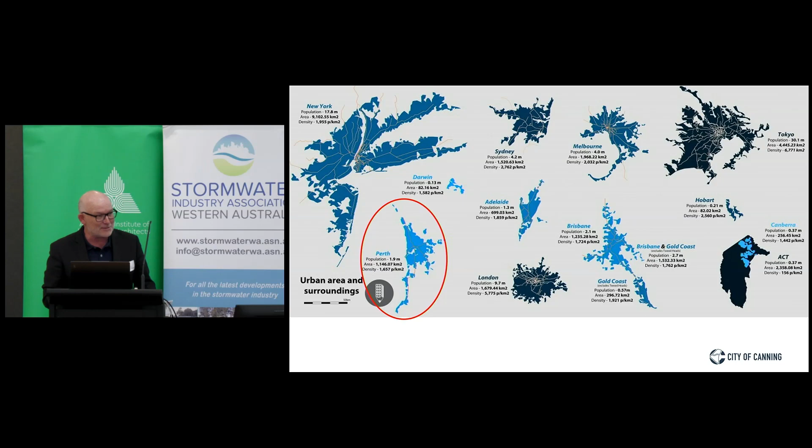From an urbanist perspective, Perth's sprawl has reached an unacceptable level. It's about 150 kilometres north to south and increasingly east into the hills. And apologies to Wanneroo, that was a very good presentation, but some of these things may seem as if we're taking a bit of a shot at it.

But as I say, from an urbanist perspective, we live in one of the most isolated cities in the world. There's a near endless supply of availability of land. Unfortunately, it only requires the levelling of dunes and the clearing of bushland and mature trees to add the brick and tile houses. But far from building the Australian dreams of the future, we've created homes crammed together in rather soulless and remote suburbs. Again, apologies.

Whilst it's cheaper housing, some 30 to 50 kilometres from the city centre, it's not affordable living for many of the young families choosing to live there because there are few other options. The state government has for years set an urban infill target of 47%. 3 years ago, only 29% of all new dwellings were in established urban areas. The policy has largely failed.

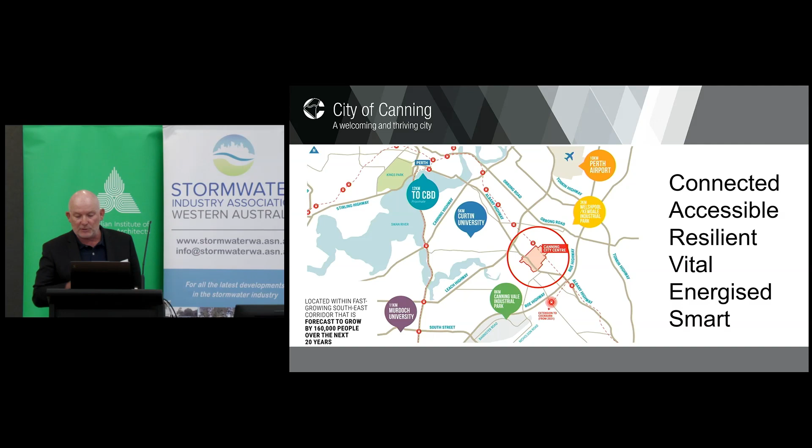So why is Canning City Centre and our blue-green projects part of the answer to Perth's sprawl? The population of Canning, currently just under 100,000, is expected to grow by 60,000 people in the next 30 years. The Canning City Centre is a designated strategic metropolitan centre only 12 kilometres from the Perth CBD. The city centre has an approved planning framework that allows for up to 25,000 people to live in the city centre. And the area is also well served by public transport, employment and access to great amenities.

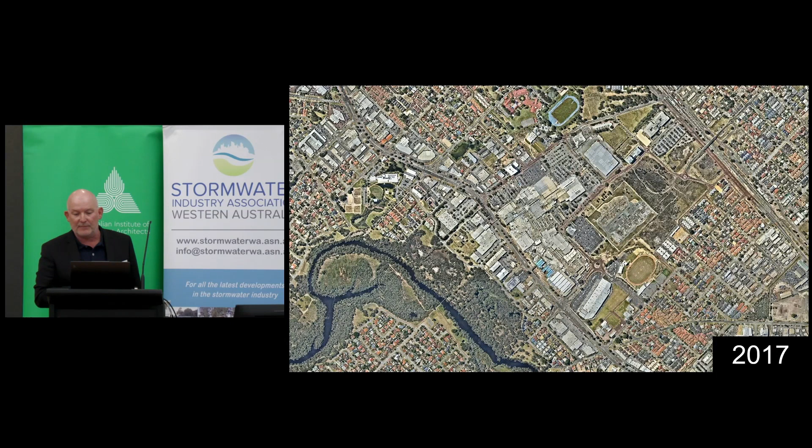In 2017, the city approved the Regeneration programme to upgrade the infrastructure to attract future investment. The investment will support the approved activity centre plan for up to 10,000 dwellings in the city centre. It's a rolling programme directly linked to the long-term financial plan to deliver our vision for the area. The first year of work that we put into the Regeneration programme was working on the finances with our finance team to make sure that this could stack up. Of course, there's a few things that might get in the way. That is the economy, COVID, and other things that don't make the development happen that we've planned for.

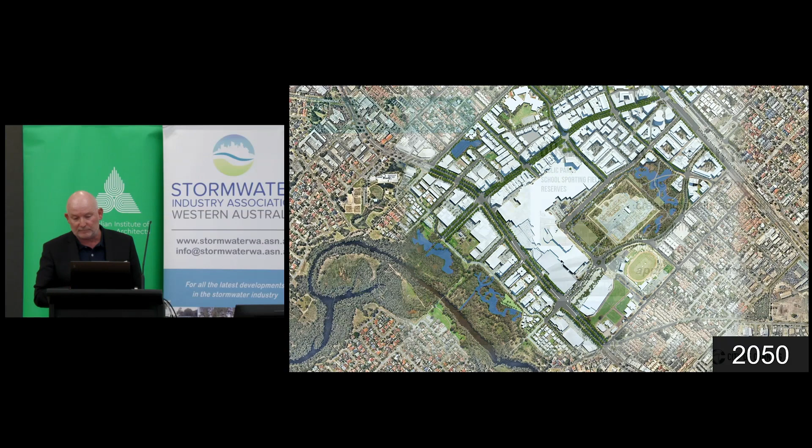We developed a story about the future of this place, one that would resonate with all levels of government, state agencies, developers, investors, and our community. The vision was for transformational change by creating a competitive advantage over the other strategic centres. We called Cannington a riverine city that promotes the importance of high-quality blue-green infrastructure for our community in partnership with Watercorp and many other agencies that are represented here today.

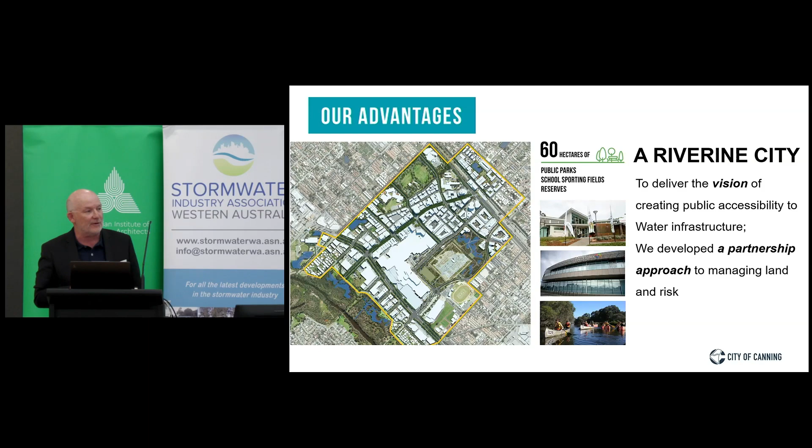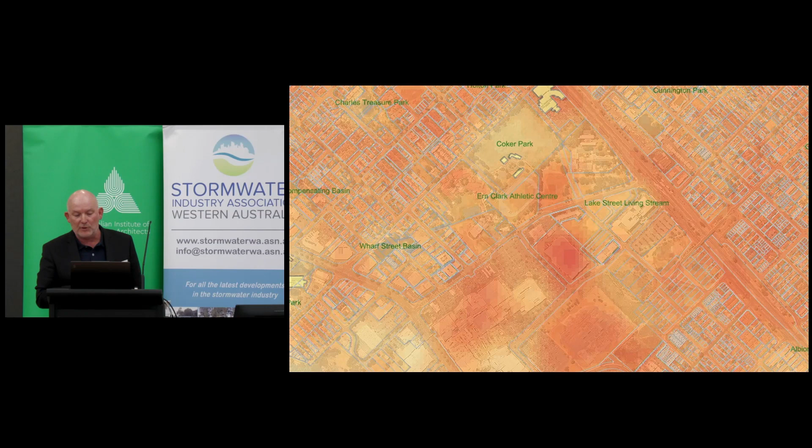The reason why we place a strong emphasis on a riverine city vision and the incorporation of blue-green infrastructure in this area is that Cannington is one of the hottest suburbs in Perth. We've got about 11% tree canopy coverage, and it's really an unsustainable situation if we carry on. After years of blocks being subdivided, trees being removed, large expanses of car parking and roofs around the shopping centre, the urban heat island effect is intense.

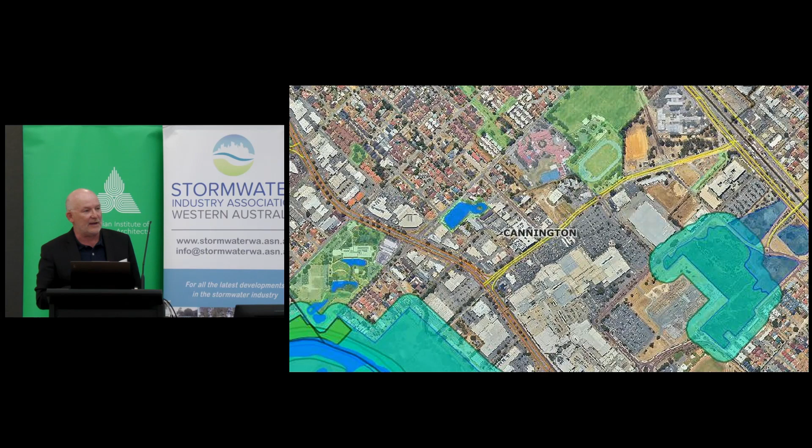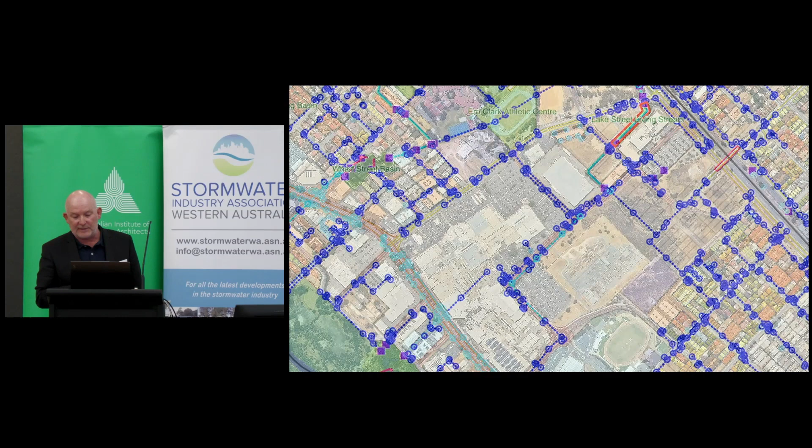Joining up the green spaces, once fenced off in Cannington, will greatly assist with mitigating that urban heat effect. We're delivering new parks in areas that were once fenced off. We're utilising the hidden network of drains and basins which become a powerful driver of change in the urban environment. We're creating the amenities required for the higher density living to support that population of up to 25,000 people. It is allowing people to be closer to nature with all the beneficial impacts that brings, and we've heard a lot about that over this conference.

But before we can win awards and cut ribbons and open these projects, there's a lot of work to be done. Essentially, planning, planning, and more planning. You can't emphasise the amount of planning that needs to be done to then successfully deliver a programme of works. This lays the foundation to attract the funding and assists to deliver successful and potentially award-winning projects. And Canning's been very lucky in that regard.

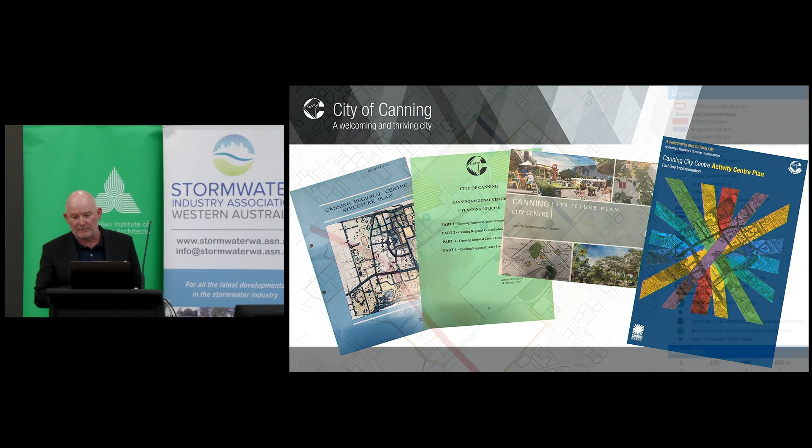The activity centre plan for the town centre is mostly zoned centre in the town planning scheme, which gives great flexibility for developers. The locations of public open space, urban streams and water sensitive areas is also shown on the plan. It allows a mix of inner urban city living with differing tenure types and should be an area of affordable housing through to more expensive private dwellings with a soon-to-be elevated station and rail on its doorstep. Strategically, the Canning City Centre can accommodate that 25,000 people over the next 30 years, which goes a long way to meet the state's infill targets.

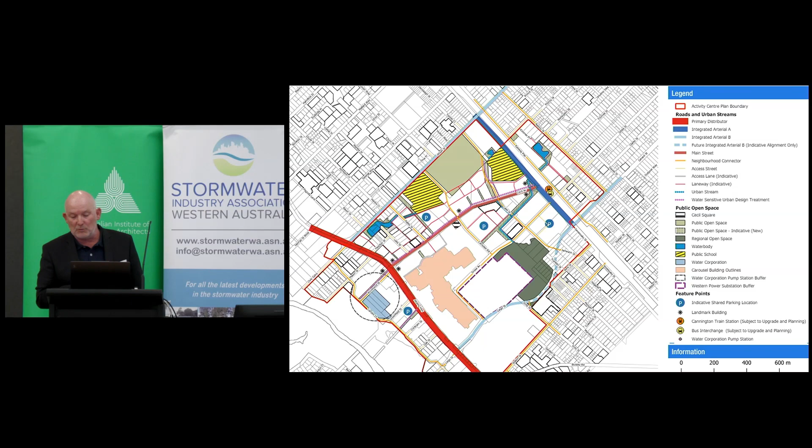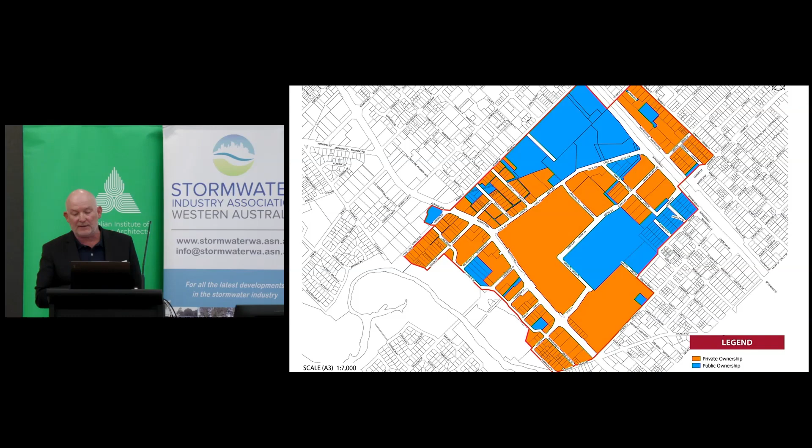Everyone involved in master planning knows that without the control of the land, the best laid plans for future development will not happen. There are large parcels of land, both in public and private ownership in the city centre. You can see that the privately owned land is in orange and the public's in blue. We are leveraging the publicly owned land to kickstart infrastructure delivery that will promote future investment attraction.

To implement our vision, the city invested significant resources into leading this planned change with a 10-year, $76 million regeneration programme. The programme is funded by ring-fencing the rate base of the new city centre development. That's all new development from 2017, and a loan facility is on hand from the West Australian Treasury Corporation to smooth out any peaks and troughs in the borrowings.

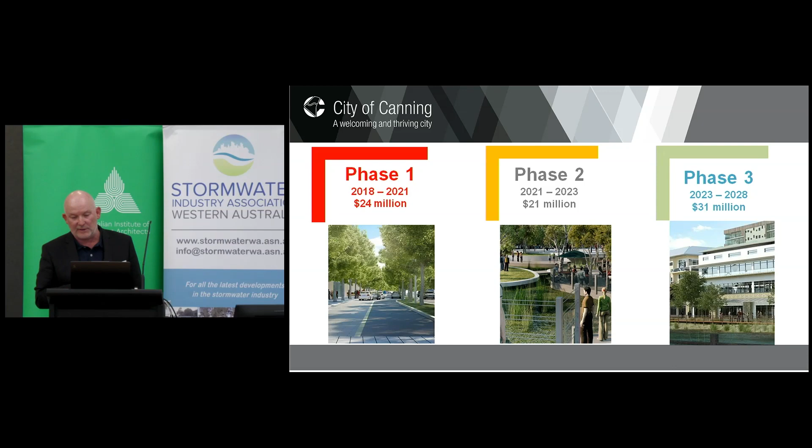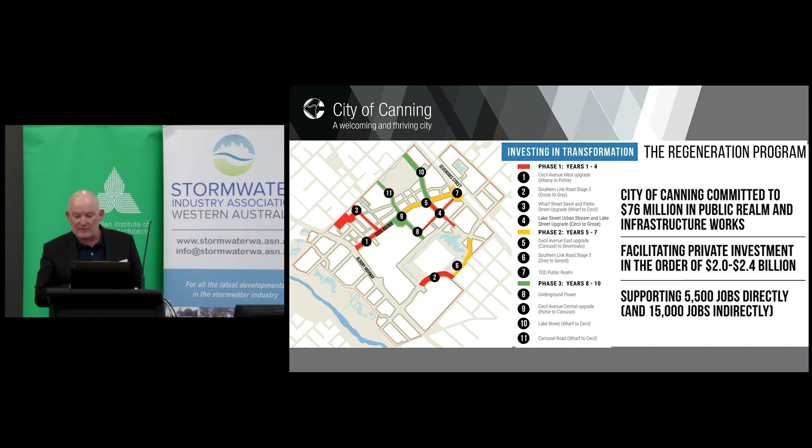When I first joined the city some 7 years ago now, it appeared the hardest part of the process was where to start. With a list of discrete projects, funding model in place, and the council's support. I can't overestimate how important it is to have the council support, and it's great to see councillors here talking about these projects, and it's an area that's really important to give a bit of credibility to what we're doing. We just needed to commence the work in a staged approach to delivering the first programme of projects. More importantly, we had an expectant community that had been part of the planning for years. They now wanted to see action.

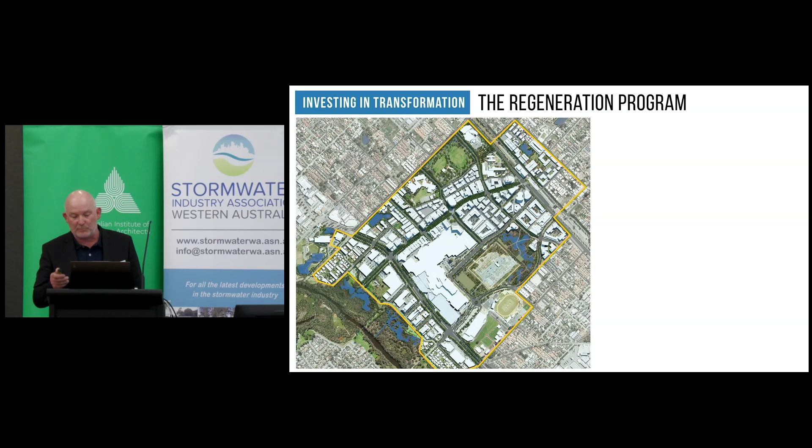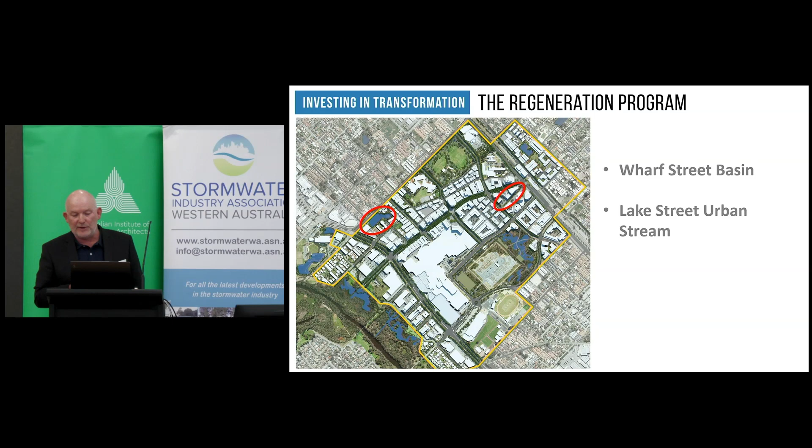To deliver on the promised amenity, the Regeneration programme has to date delivered a number of projects, but 3 significant blue-green projects. Wharf Street Basin opened in September 2020, the Lake Street Urban Stream completed in 2023, and the renewal of Cecil Avenue, which was commenced in early 2019 and was completed in December last year. Rachel will now give an overview of some of the projects.

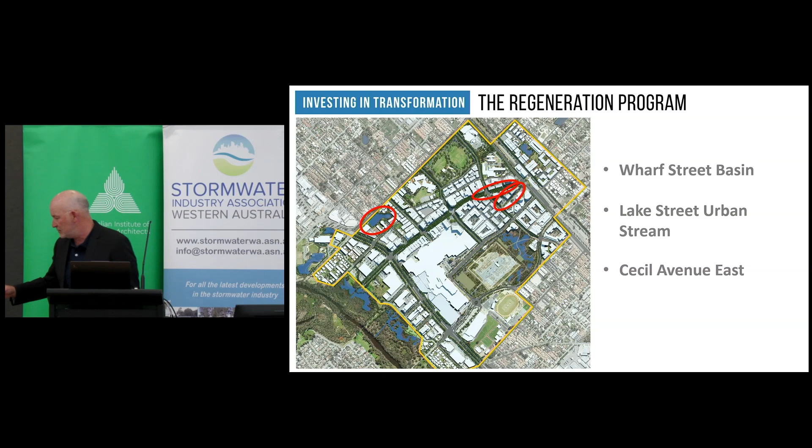So we've heard a lot about collaboration over the last couple of days, and water projects like the ones we've been delivering in the city centre can't be done by a council alone. So the city has developed strong partnerships with state agencies and other organisations for funding and also for support to deliver the multiple project outcomes. These partnerships were particularly important in the delivery of Wharf Street Basin and Lake Street Urban Stream.

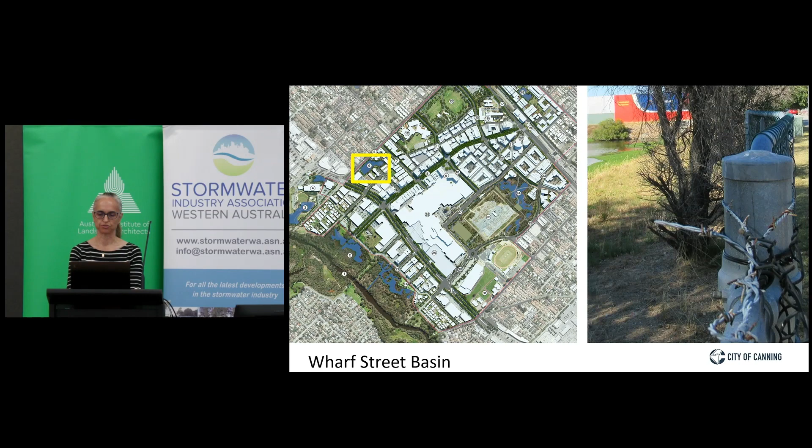We developed a plan to create a multi-purpose space that embraced livability and environmental sustainability in order to attract investment into the regeneration area. To support the population that we were looking for, we needed to have attractive open space and public areas. The project was the beneficiary of a $1 million federal Smart City grant, with the total budget being $3.5 million to deliver 1 hectare of new community space in the city centre.

Water Corporation, as owners of the site, were an important project partner and also contributed funding through the Drainage for Livability program, as did DWER. We also developed partnerships with the other organisations listed here to be able to deliver the multiple project outcomes. Research undertaken by Curtin University as part of this project has indicated that Wharf Street Basin has achieved its objective to become a livable community park due to the number of visitors over the study period and its use for a range of different recreational and social activities.

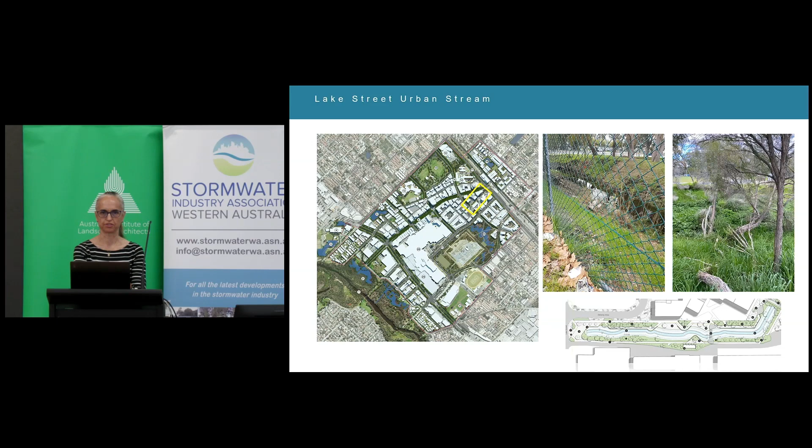The second transformative project is the Lake Street Urban Stream. Giles spoke on this yesterday, so I'll just whiz through the information I have on Lake Street Urban Stream. But it was fenced off for 60 years, and its design and delivery had been planned for 15 years and was finally delivered last year. Water Corporation was again an important partner in this project as they were the original owner of the land. Differing from Wharf Street Basin, as part of this project, the city has acquired ownership of this land and is now responsible for the ongoing maintenance.

So if you ever want to take on one of these projects with Water Corporation, you'll hear a lot about capacity modelling and hydrology when delivering drainage for livability projects. Both Lake Street Urban Stream and Wharf Street Basin are part of the local stormwater drainage network, and they still needed to be able to protect local properties from flood risk and to divert stormwater.

And here are some photos. You saw the Lake Street Urban Stream storm event yesterday, but we've also had a decent event at Wharf Street soon after it opened where it looked more like a lake than a retention basin. It shows that the sites can still work even though you're building into the sites.

So Lake Street Urban Stream was a design and construct project which worked out really well. And as we heard yesterday, one of the key aspects of the delivery of this project was the retention of some of the biodiversity within the site during the construction process, as well as the reuse of some of the wood from the old Shelley jetty, which made this beautiful decking area.

So now we have a beautiful linear park to enjoy while people walk from the train station to the shopping centre. So this photo almost looks like a landscape render, but it's actually real life. The transformation of this stormwater drain has been remarkable. Right from the completion of the project, people from the adjoining office building, which you can see in that photo, have been spending time along this newly landscaped area, enjoying its vastly improved amenity.

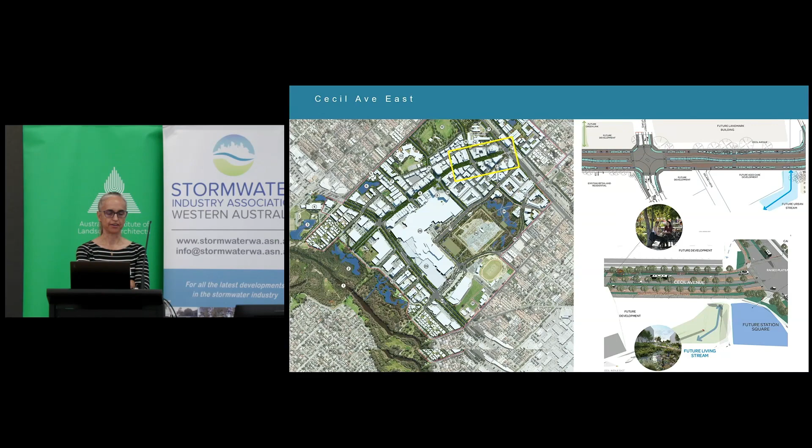The third important project for the city centre is the rejuvenation of Cecil Avenue. This is a key connecting road from the train station towards the Canning River. It has dedicated bus lanes that can be converted to carry trackless trams or even light rail. It's only a road, but it's one that's been reimagined as green infrastructure. It now has wonderful shaded landscape nodes for children to explore, with over 130 new large native trees and rain gardens. These are all designed with a water-sensitive urban design drainage system, incorporating rain gardens and sculptural art elements.

Our road verges were designed and delivered by our consultants, civil engineers and landscape architects more as places for people than cars. With art, decorative lighting, and a profound cultural narrative for people to engage with, this is communicated powerfully by the Indigenous artist Darryl Bellotti, who designed the filigree elements on the median light poles, which you can see in this photo. Blue-green infrastructure is about connection with nature and the narrative of place, and that's how traditional owners have been managing land for thousands of years.

Both Yamaji and Noongar descents. I work as a graphic designer in the Perth metropolitan region, and I service both government and the corporate sector. The Canning project, to me, is really insightful in terms of giving people a window into the culture of the region and the history of the region and the people that live here. And being a young person myself who spent a lot of time growing up here, I know this road really well. I used to walk along here in the summer and sweat it out, and it was a little bit of a drag to walk through. So to be a part of the regeneration, I think it's really good. And as a young person, seeing this kind of stuff would have inspired me to keep going and try harder. So hopefully that's what it does for the young people today.

As a young person growing up in the area and walking from Cannington train station through to Carousel, sometimes as an Indigenous person you feel a little bit like an outlier in terms of society, and I had that feeling constantly, especially going to the shops and some negative experiences there. So had I had something like this available to me when I was a young person, knowing that there was a story here that connected me to my culture and my history, and that it was inclusive in terms of everyone being proactively engaged and wanting to learn about it, then it would have made me feel a lot more centered and settled within myself, and it would have made my day-to-day experience a whole lot better. But at the same time, it's part of my story, and experiencing that allows me now to go out and teach so that I can make things easier for others and educate anyone else along the way too.